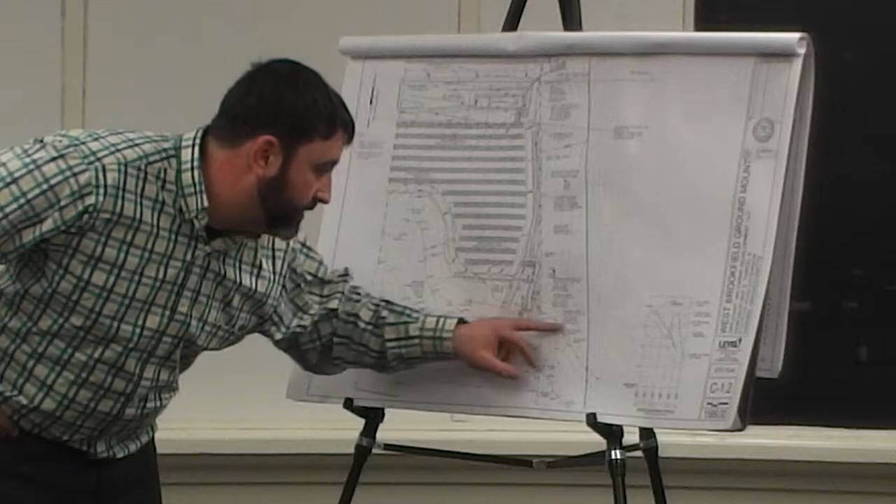One of the lower ones on the right. Invert in 844.5, out 844.1. So half a foot for that one pipe. You got 6 inches of settling in that little triangle, and an 8-inch pipe.

So back to your concern -- final cover is going to be determined by the planning board, whether it's grass. So even if you have grass, there will still be open areas -- we understand that, it's never 100%. To address that, we have a maintenance plan, whether it's wood chips or grass, the site's gonna be maintained.

For wood chips, as we like to describe, as the wood chips are placed down, what we prefer is that as the wood chips begin to degrade, any areas that are degrading -- it's kind of turning into topsoil -- they'll go in and seed those areas as needed over time.

If the area is seeded and we're seeing areas of concentrated erosion where you're gonna see channelized flow from runoff, that will be addressed -- those areas will be raked out and stabilized. The site is inspected and maintained, with reports that will be submitted to the Conservation Commission -- that is probably somewhere in there.

You mean the maintenance plan? We submit -- well no, that's after construction. After construction, we can easily, if the town wants -- we've done it with other towns before -- submit maintenance reports, monthly or bi-weekly, however you guys feel comfortable, we can put that as a condition.

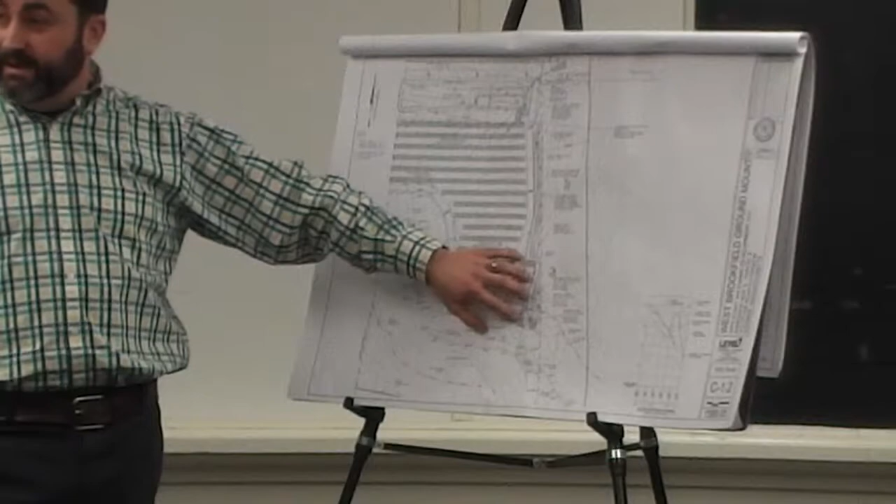For this site, I'd say 80% of this flow is gonna enter these swales prior to entering the basin. And you can see here, even on this one, after we talked about having the water run over the gravel access driveway.

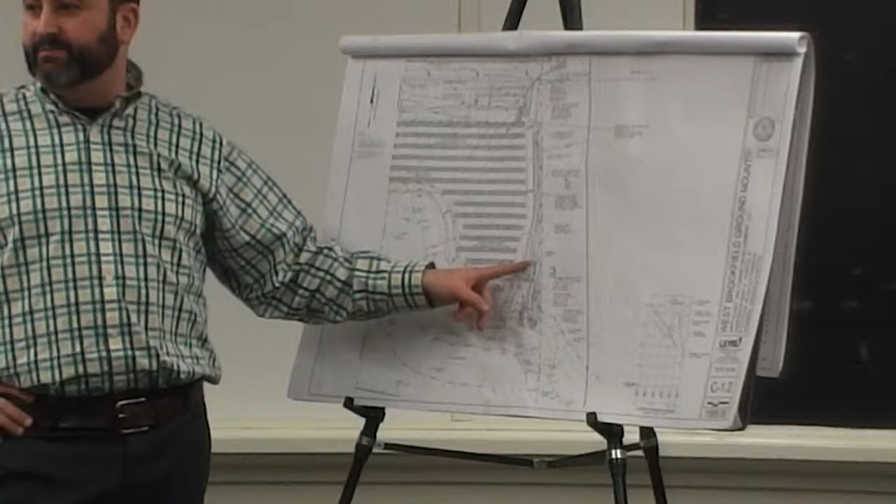On this side, I came in and put a catch basin that has a sump. If you guys want to see something of that nature on this side, I can provide that. Water comes down the swale, goes into the catch basin grate, a double grate catch basin, it's got a 4-foot sump. You'll get some settling in that, and then that goes into the stormwater basin.

I can add a second one to that side if you prefer. I didn't know if you wanted to see a copy of the code. It's required documentation, including computations for each stormwater standard - this is a mass standard. This is what's required for documenting compliance.

Correct, but we don't have any impervious area with regards to providing water quality. It says applicants must demonstrate there are no untreated discharges. New discharges are adequately treated. There should be no untreated discharges or erosion into a wetland.

Correct. So for water quality purposes, with regards to TSS removal, with regards to sedimentation, impervious cover - I'm not gonna argue back and forth with you. The consulting engineer who does this all the time, who's a licensed professional, did not even mention that concern.

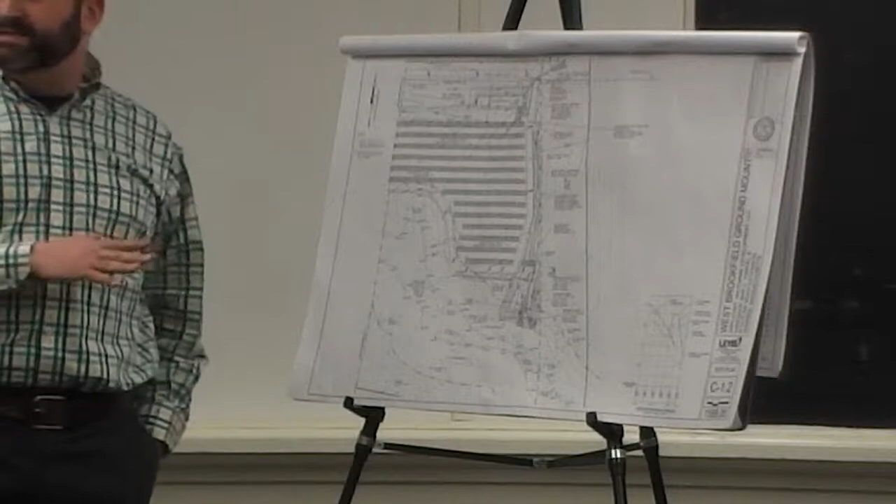I've done 5 of these sites, and there's a lot of things they didn't mention. We have never had that issue before on any of these sites, so... Well, conversely, out of the 16 applications we've received for solar projects, every single one of them has addressed removing of solids.

They have never just crossed it out and said, just because we don't have pavement, just because there are surfaces - they try to address what's gonna happen with the solids, the dirt, the sediment. It should not move and get into the wetlands. Everybody's addressed it. You are the only one who hasn't addressed it.

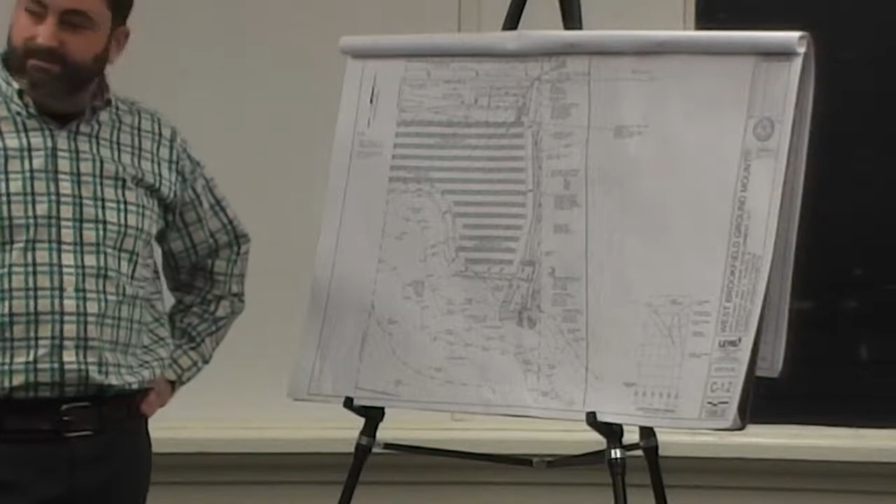So we're asking - you said you would put in a sump or something. We have that one on this side, I can add a second to this side if that's preferred. What is on that? A deep catch basin with a sump. Do you have one already that I'm not seeing? One right here, yes, this one.

So yeah, that's reflective to the talk we had about the water coming down the swale. We didn't want it to go over the road. So like I said, I can add one to this area right through here, and if you prefer, we could do some extra grading that kind of sheds the water that way.

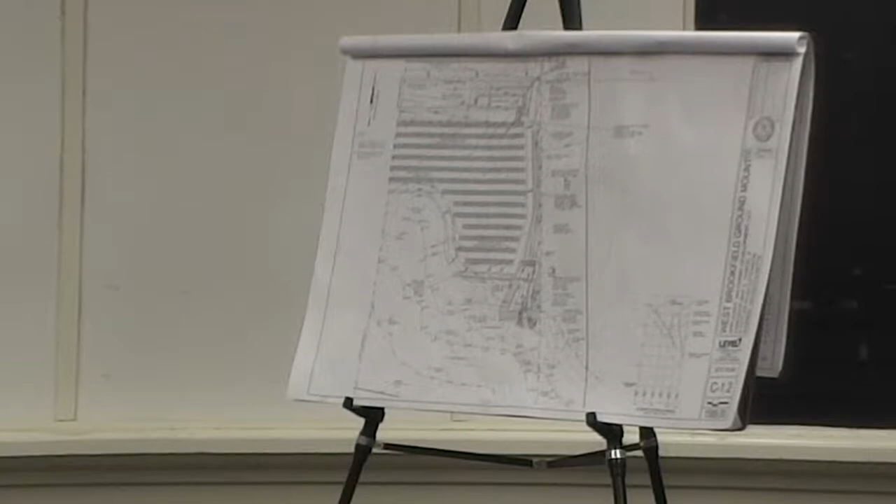The concern is, if you do the wood chips, we're more concerned than if it's vegetated, right? Yeah, so if planning's saying no, we're not gonna accept the wood chips, then it would probably be vegetated, it wouldn't be an issue. We understand, like I said, we prefer the wood chips - we feel it stabilizes the site quicker and it's easier maintenance.

But if the planning board chooses, if the committee feels more comfortable that we seed this lot, we have no problem doing it also. It's not our call. I think I would probably, because for the short term it may make sense, but to me it doesn't make sense.

The wood chips are more immediate, we'll agree. The wood chips are fantastic immediately, but over time they don't last. And then you have all this water rushing off the panels onto wood chips. How long is that gonna last?

I agree, further we will propose that to the planning board, to add as a condition that we will add vegetation. If you guys want to put a written recommendation so the planning board's aware of that, we'll be happy to put it on the record, convey that to them, and we'll make the change if that's what you're looking for.

So the next question is about the water that comes out and the amount of water that comes out. Are you required to calculate recharge, which is something you didn't have to include because you have pervious panels? But ultimately the water is being funneled into a swale, there's no more trees to pull up the water, there's no more root systems.

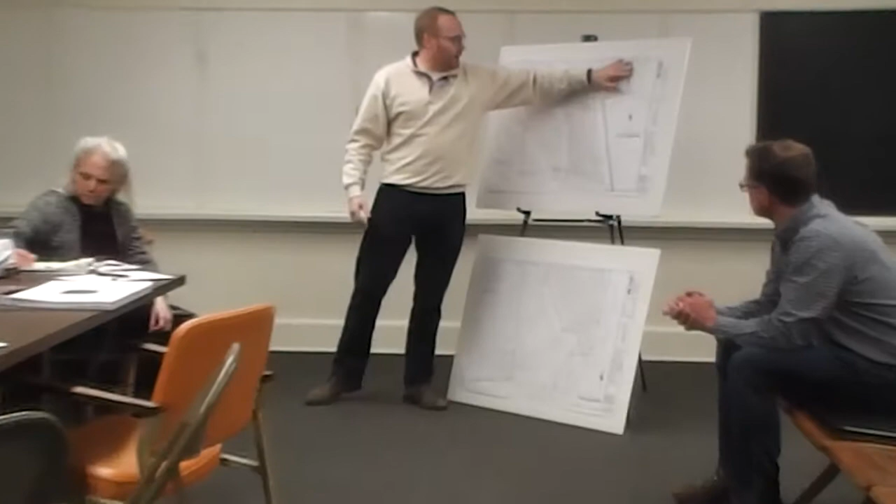The other thing we had to talk about, and the main thing we're here for in the notice of intent, since we are otherwise staying out of the buffer zone, is our crossing here at the center south of the site on the east side. We discussed with you last time, it's a really short crossing, not much longer than that table. That is effectively water that has been channeled after a clearing operation some years ago. Looks like it started out as a rut for logging trucks and equipment, and sort of became a nice little wetland channel to this larger system up here.

Keith and the third-party guy, Paul, and Dan, we got three of them out there. They all agreed that's the wetland there as depicted. It's a pretty short crossing. So we talked last time a little bit about trying to find a spanning solution because it's not that long of a crossing.

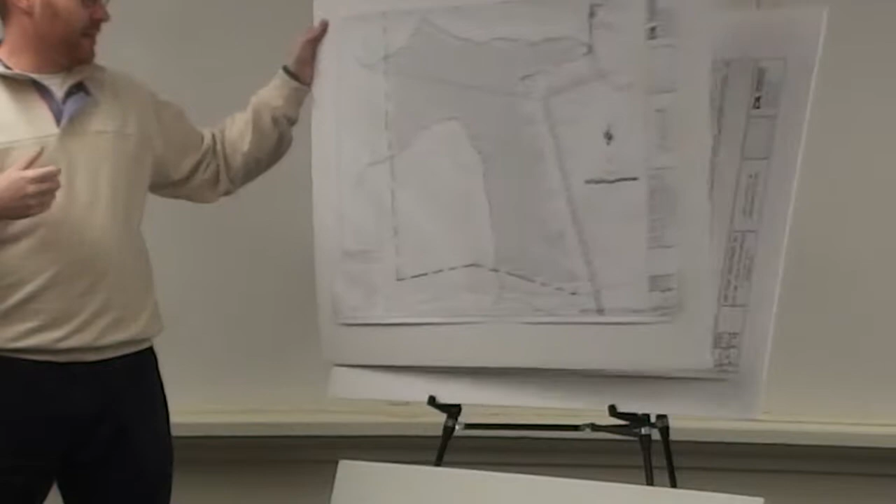That is something we discussed the last time you visited. I also mentioned that we needed additional information from Keith on the replication, the replication information. I spoke to Keith regarding that. He said it was included in the original application. There is information, it's a very lightweight version. We asked that you follow the wetland replication guidelines, and I did see that response, but what you submitted doesn't really cover all of the questions that the wetland replication guideline is asking for.

They're asking for test pits, they're asking for a little more information about the replication area. It's a little more intensive than what we have. What we have is sort of like the Monarch Notes version of what we'd be looking for, which is fine for when you're not getting into the nitty-gritty, but we want to understand more about it.

Again, understand that the wetland crossing is not a given going into the wetlands. We may issue it, but the chances are we also may not issue it. We want as much information as we can get.

I had spoken to Keith regarding that, and what Keith said was that part of it was included, and it was lighter weight, but he also mentioned that if Paul needed additional information, he would work with him. He thought it might be a good idea, instead of replicating since it's such a small area, to look at the potential for improvement of an area that the commission may have ideas on. Essentially it's a rut, and if there was an area where we could improve a better wetland and try to make new wetland area, that you guys might be amenable to that.

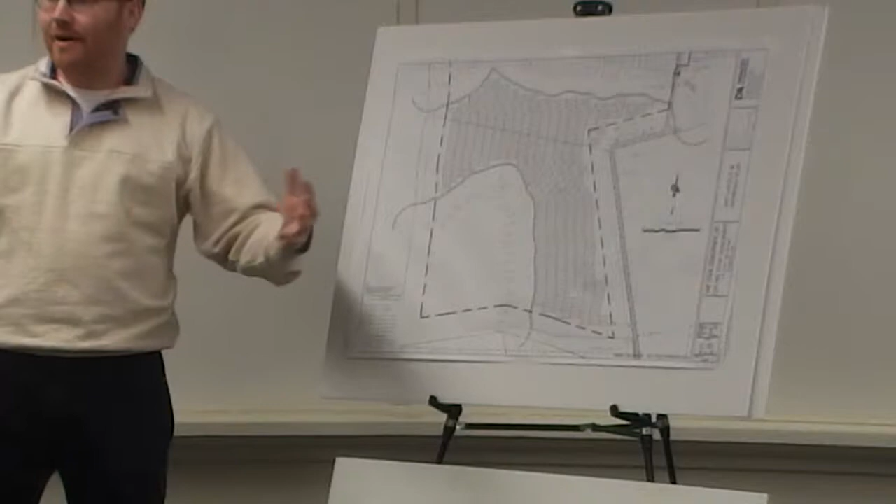Or add species that improve the wetlands, because we have a fairly large acreage on site, and it's still scrub area, so it's got a lot of choice in what it's going to become over time, especially as we lock this site down for 20 years. I guess part of what we want to discuss is the relative value of a generic 1,000 feet of digging down to make a wetland out of upland, versus what we can do with the rest of the site.

One of the things we do on the upland side, in that mindset, is we keep bees and meadows and wildflowers, because that's a nice way to use the property, as opposed to just generic meadows. I'm not a big fan of that wood chip idea they have for the other side, because it becomes a small little reserve. So what can we do that supports that, rather than just digging down to make the water level closer to the ground and make more wetland, in an area about the size of this room.

Yeah, I mean, I'm not against the idea—it's an interesting idea—but I would like it well thought out, as opposed to... I walk this property, but I don't walk the whole site. It's a big site, and that's why we hire a peer reviewer.

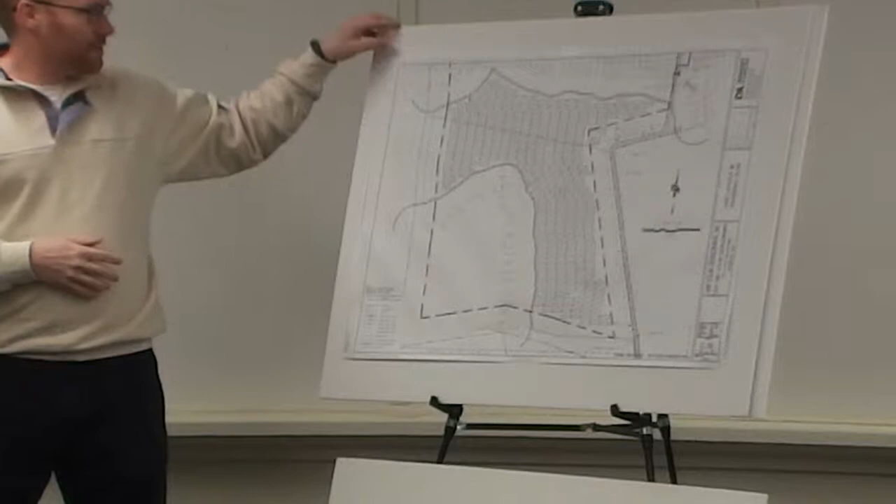Yes ma'am, we wanted to see the crossings, so we went there with Mr. Spain. I'll have a conversation with GZA and see how they feel about it too. I think I'd like their feedback on this.

That was something Keith said, when I asked him for more detailed information—he said he had included it. And then we went down another road of spanning, and then down another road of that. So essentially, we wanted to get your thoughts, and then obviously go to the wetlands consultants and find out what they think would be best.

Because again, if we span it, but you guys say, well, you're keeping the openness ratio, that's great, but that's not a wetland anymore because you completely block the sun out so nothing can grow in it. True. So why not just fill it and then replicate?

So before we went down any roads, we just wanted to get what you guys as a commission think. Well, it's not... I mean, it's meadow, it's marshy. It's not your typical beautiful wetland. No, it's not.

So again, the conversation I would like to have with our peer reviewer would be this: I think I would prefer a span versus a gravel road, but maybe not.

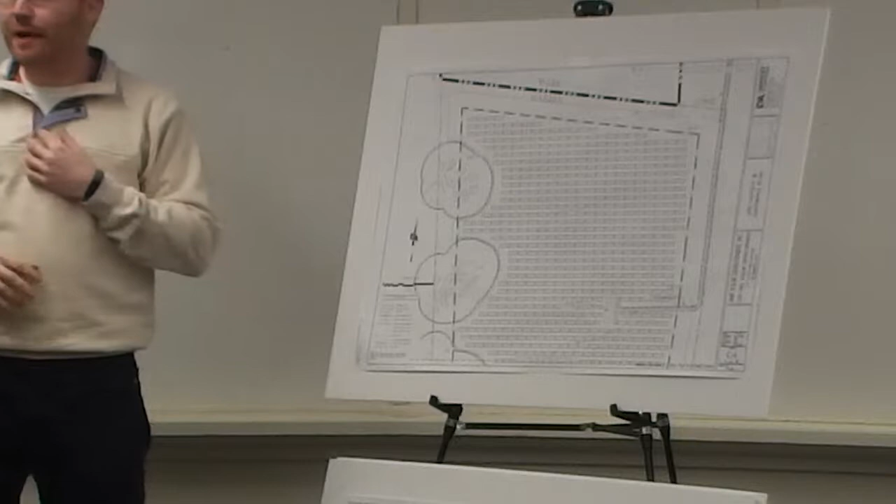That was again trying to make sure the hydrology is never threatened - that was the creative way to get a bigger opening without having to go to some steel span across the site. That's one or the other.

Our goal is not to put down the standard thin gravel road and just put a little 1-foot culvert in there and call it good. There's a bit more water there than that in the rainy seasons, and I don't think it's reasonable to expect it to be just as dry in future years as it was this year. We got to build it for 20+ years, so that's not really a shortcut we're looking for.

So let me ask you about these plans. Just to be clear, the black heavy dotted line is 100 feet from the wetland setback? Yes ma'am, that's 100 foot from the property line, from the wetland. And these are the same 100 foot? Yes, you're right, same thing, 100 foot from the wetland.

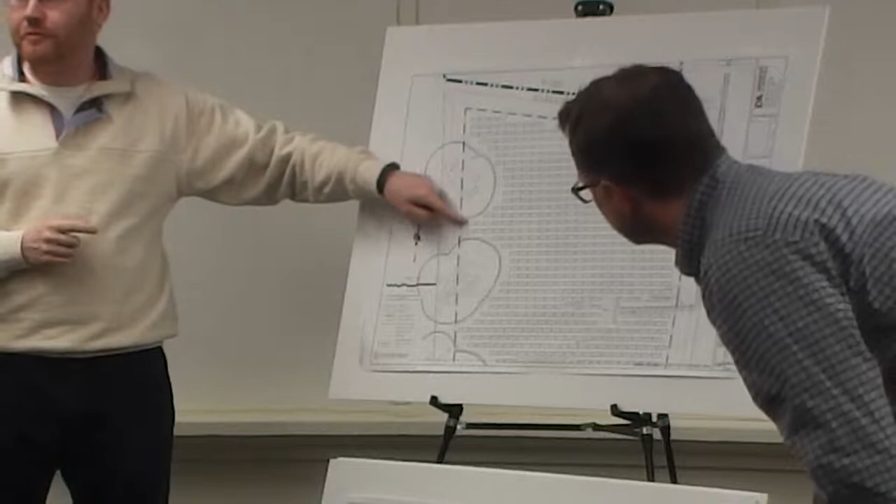And then you have the thinner dotted line directly underneath that goes around - that's your limit of tree clearing? Yes, limits of clearing. So we've left more or less a vegetative strip around the outside.

I'm going to point out that that will probably not fly with planning. You have your own conversation, but we have a 100 foot... it's kind of, what is it? It's a 100 foot setback and natural vegetative buffer of something like 150 feet.

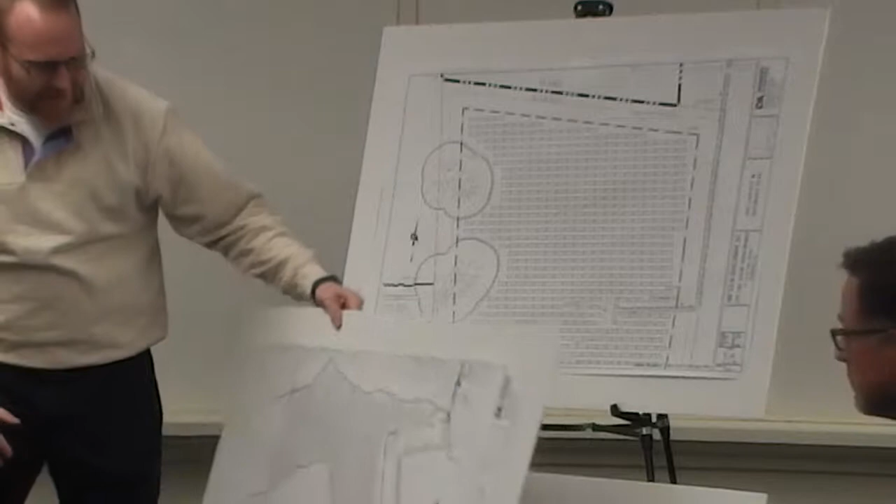So the 150 is for properties in residential use, and it's 100 for properties that aren't in residential use. And so none of these surrounding properties are in residential use, except for this one over here. Are you sure?

Yes ma'am, that's something we discussed with the planning board - that wasn't in the original bylaw. We only have one solar bylaw. Okay, all right.

And those are just some of the features - like over here, this is Massachusetts-owned conservation land, so there's no functional neighbor there, and that's the cell tower. Cell tower's right over here.

So our property - we've got a lot of neighbors, but none of them are terribly using most of the land. The neighbors on this side, if this is top to bottom here, there we go, this is kind of top to bottom.

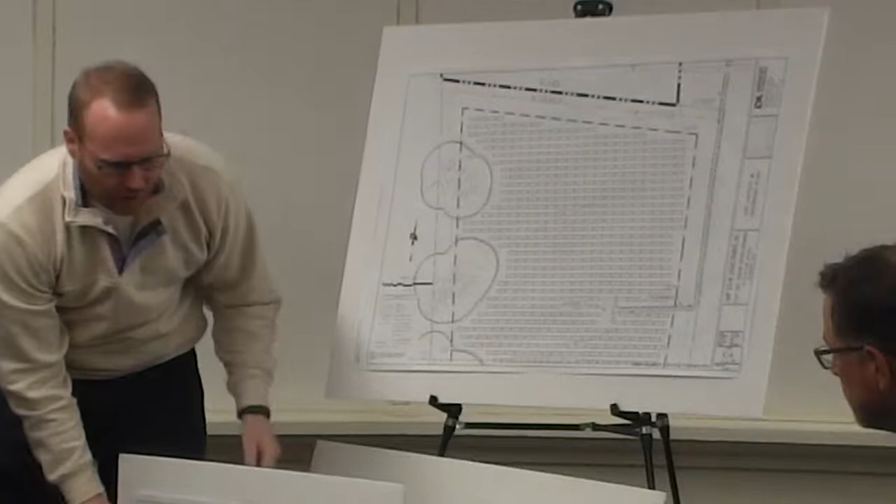The neighbors are all over here, and what about on this side? Nothing - it's a giant downhill all the way to Town Farm Road. The neighbors are the better part of half a mile away. Oh, the houses are down there? Yeah, all the way down, this hill just keeps going, for a better part of 100 feet of elevation.

And I think this parcel is 80, 90 acres, just right here, all the way down the hill. There's zero ability to have any functional neighbors unless someone starts building houses at the top of that hill, which is challenging and probably a wetland.

Okay, all right, well when I saw that I'm like, that's the trick - it's gonna get stopped and change again. Well that's the trick - we stay out of the 100-foot buffer, because that keeps us clean.

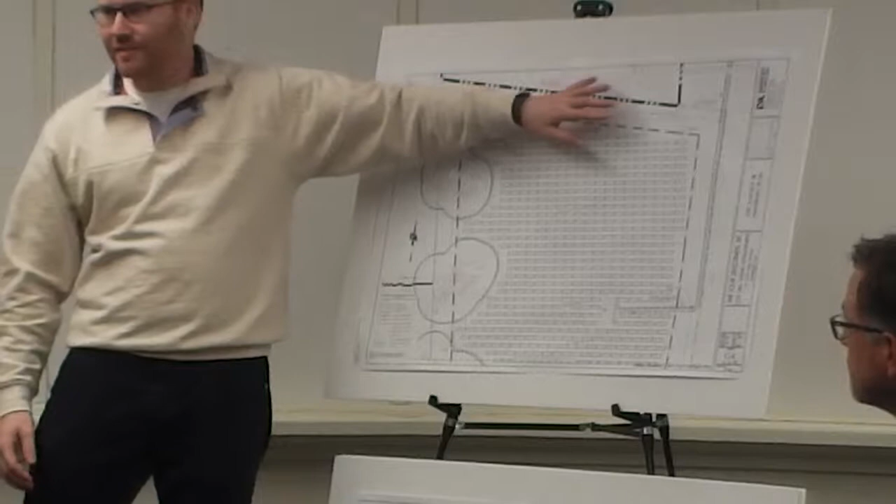And then we'll talk - for instance, something I would ask the board in their discretion, if this is completely conserved land with never a neighbor ever, I might want to use some of this, as a give and take, because that buffer is meant to protect neighbors in the community.

Well that's definitely a planning question, just for that kind of stuff - that's what would change, nothing relative to our jurisdiction in this crossing. Yeah, that's gotta get solid.

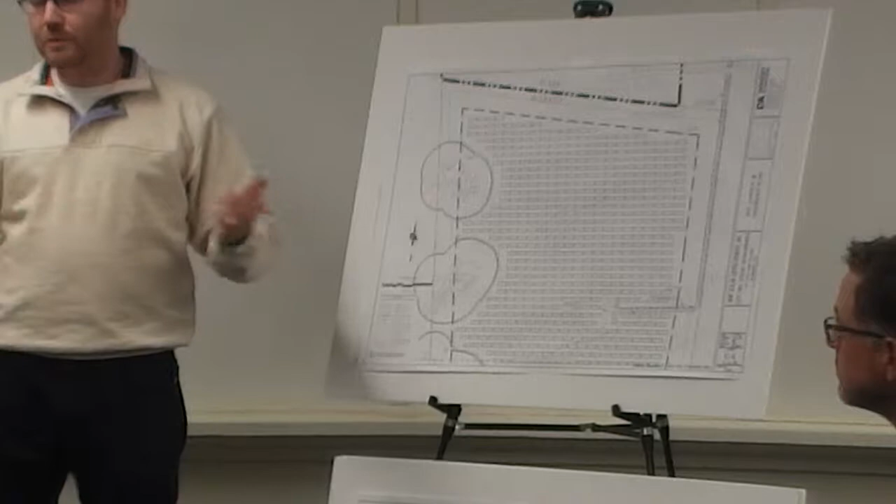So I think the homework we've got now, we'll dig more into the crossing concept with a span. And if I can get - the real trick is, is it gonna be cost effective and practical? I can't go spend $200,000 on a crossing in the middle of the woods, or what used to be woods. To try to avoid that, there's gotta be some cost effectiveness there for me. But I do want to avoid impacting the wetlands, and I do want to avoid the cost of replication - kind of shoehorning it in there because we have to.

All right, so let me just take a look at...

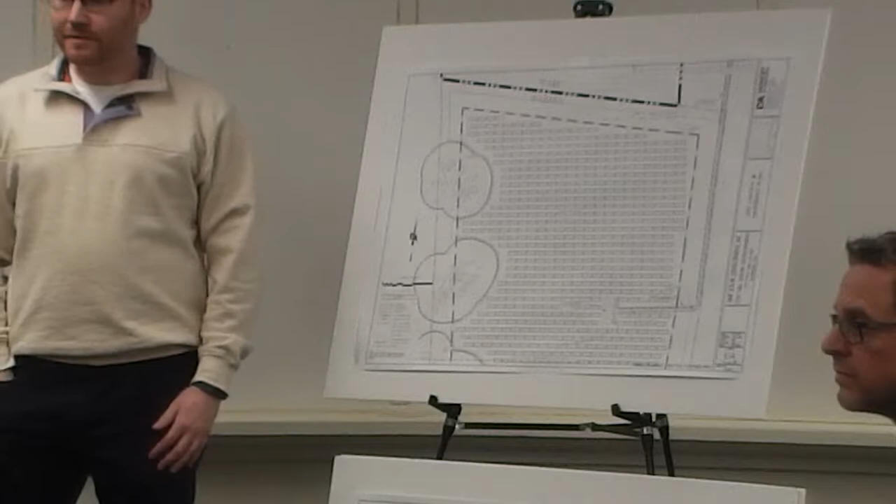Well, is this it? This is it, that's it. It wasn't bigger than this, huh? No, it's fascinating, a 12-foot crossing. It's not even, the wet area didn't go further in either direction. Well, it goes north, east and west. It expands to the east, and it's pretty skinny.

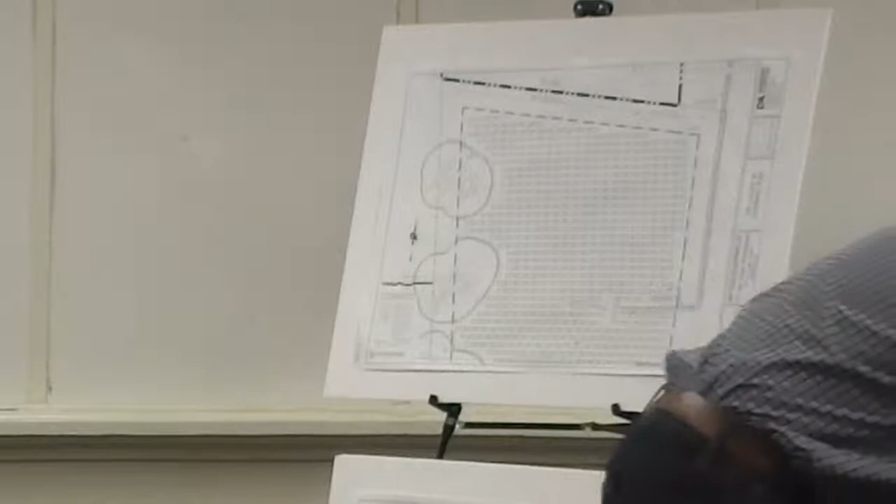So, north, okay, east. So in between the blocks is the wetland. The blocks get a little big here. Yeah, so they run just down, so skinny, basically. You're running in between each one of these. And then what about on this side? It widens up a bit, it gets wider. D8 and 9, D7.

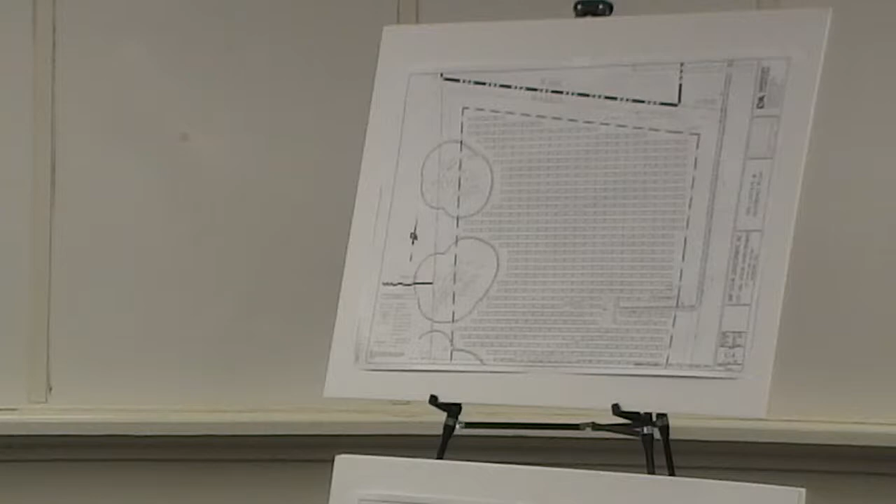So this is what I'd like you to do, if you can. Can you take this and blow it way up, this section right here? Blow it up and email it. Can you do that? Because that would help a lot to be able to have the conversation.

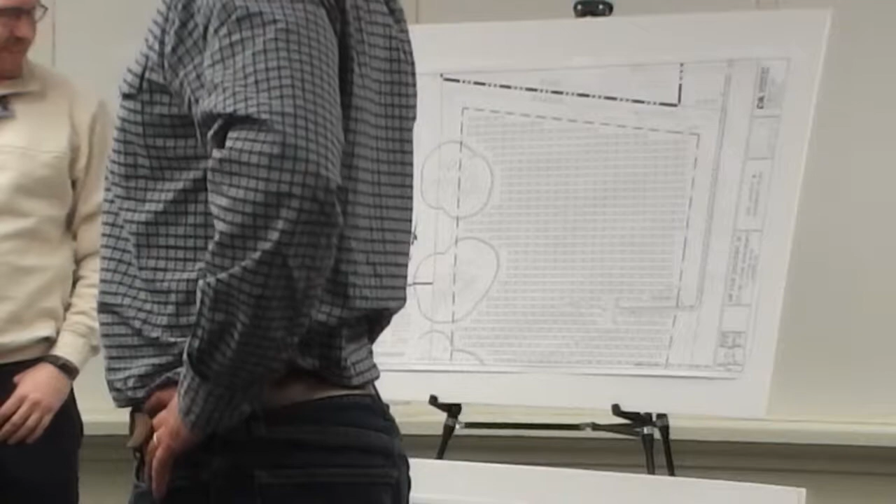We'll put it at like a 10 scale, ideal, something where we can see a little east, a little west of it, a little north and south, but mostly what's on east and west. Just so we have an idea of what it looks like, where the wetlands are, and that they're not overtaken by giant squares. At that scale, it looks like squares. That would be good and help us with the conversation.

Okay, and then we'll get you that, I'll try to get you that tomorrow. Okay, that would be good.

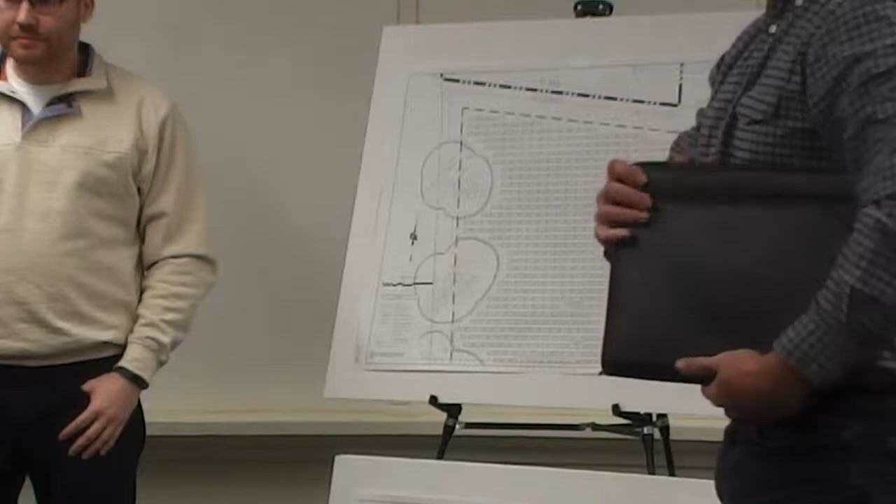So, I guess the only question I have, similar to the previous guys exiting, I think largely our conversation is down to just the crossing and the style of it and any replication around it. Well, that's pretty much, yeah, we're still in the same spot, so we haven't really moved forward except for this.

The wetlands are agreed to, the wetland lines are agreed to. Okay, so now we just need to figure out what you want to do and propose it firmly.

So, is that a point in which you're willing to give us the same reference to the planning board, that we're down to this point and we can start talking about the rest of the site? Because with the planning board, it's everything. It is a lot. What I will tell them is that we have absolutely no idea what we're doing over there on that section, but everything else, the wetlands, the delineations, are fine. Perfect, okay, I can do that.

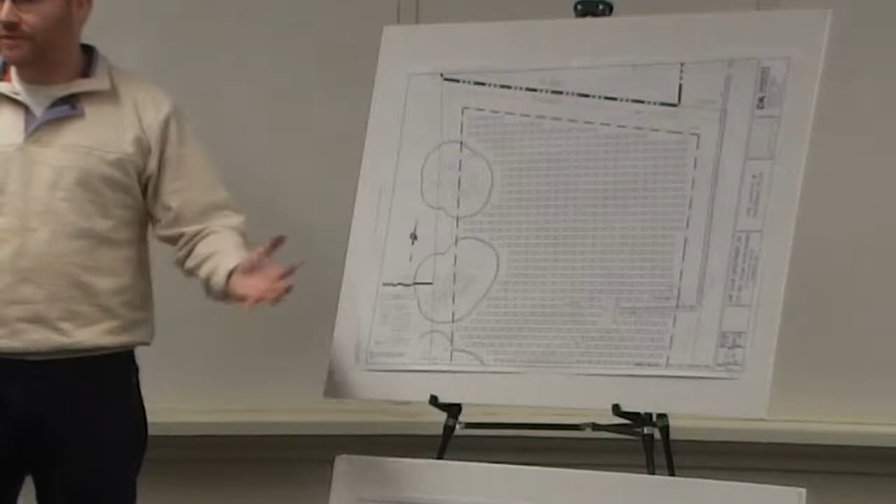And remind me to email the planning board too, please. And if they want to take us first, or shelve us with those other guys, that's fine, but we're going to have six meetings anyway, and we've got plenty to talk about. We don't have to focus down on that one for the first meeting. Yeah, they'll make a decision on whether or not they'll move ahead, but I'll send a note. Thank you very much, guys, appreciate it.

Thank you, all right, thank you. Can I just have you sign in? Yes ma'am, I did. I was the first one in, other than you, somebody was here early.

Well, I'm happy we're not quite as complicated as the other ones. So are they on for 7:30 on the 13th then?